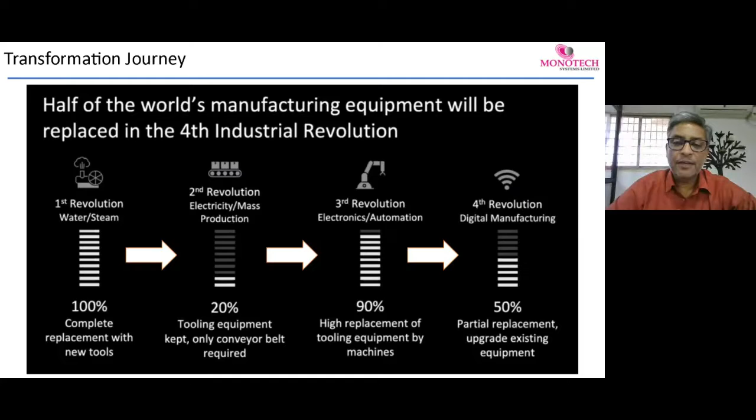As we know, half of the world's manufacturing equipment will be replaced in the fourth industrial revolution. I heard a few guests mentioning that we have not been through the three earlier revolutions with respect to shipbuilding, but it's like we are getting into the fourth revolution directly with these technologies. I guess shipbuilding and maritime will have a great opportunity getting into additive manufacturing and the fourth revolution with these applications. So we believe this is going to be the future and it's going to stay, but it also depends on which application, which technology has to be suited.

This is where we would like to provide a value proposition of AM in maritime shipbuilding. We'd like to break it down into a few things: what is the value proposition of AM in maritime and shipbuilding. We've been listening to metal technologies, metal printing, but there are other technologies as well which could provide value to maritime and shipbuilding. When we break it down to the basics, we talk about lower costs, which is a requirement of any industry today, probably not for aerospace, but for others, even maritime and shipbuilding. The requirement of lower cost is very important, which can be classified into products, the clarification of what is required, and supply chain.

And so the products, we will have to go for less material and no tooling or cheaper tooling. So this is what will give us lower costs, and in the supply chain it will result in less transportation and less warehousing, as we heard Dr. Ashok Verma saying that less warehousing and less transportation is going to be the result of additive manufacturing, which is going to have localized manufacturing.

We are talking about better designs. So complexity for free, different materials or multi-material options, optimized integrated functionality and part consolidation. So these are all things which are the basics for additive manufacturing in any industry. And this will be the beginning of additive manufacturing in any industry. And this will further go into manufacturing and rapid tooling, etc.

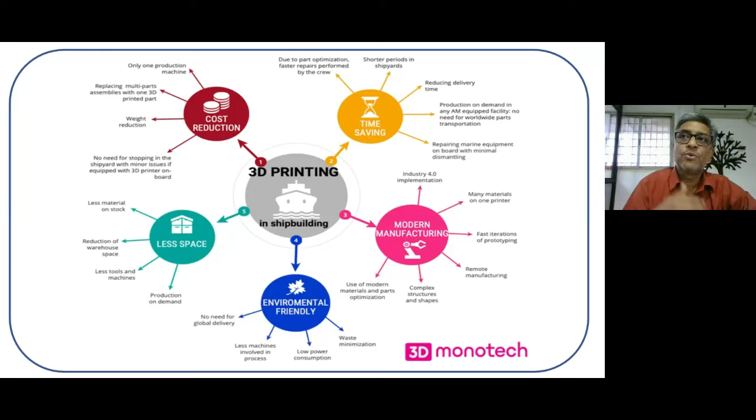What if you can have a robot with a DED technology into the submarine to do that sort of operations? These are the boons which this technology can really bring about. And then we go into the further of what these value propositions mean and the technologies which can be utilized for this, which is scanning and reverse engineering.

For example, we are talking about many components which are obsolete or produced by castings, and most of them it's very difficult to actually inspect them. So we could either inspect or reverse engineer, or we can do periodical quality checks using scanning and reverse engineering. And a small video on this. Sorry.

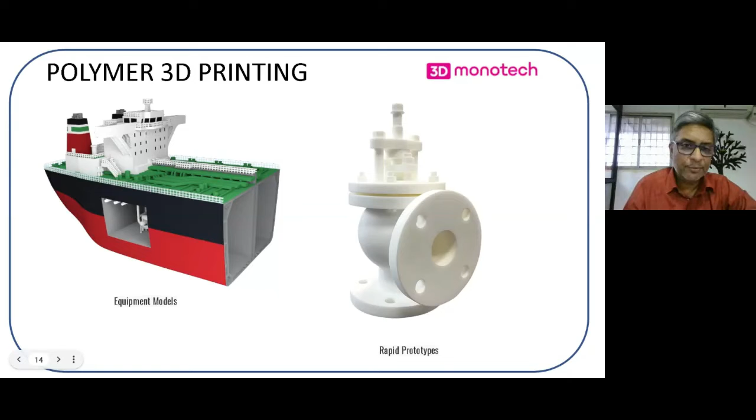But what we need also is planning. So for planning, we will need equipment models. We have to have accurate models which are as per the parts, and also rapid prototypes. So these are also important parts of this industry. And also, how polymer technology can be utilized for larger structures in sand casting patterns. This is a small video I would like to show.

At CJR, we manufacture stern gear for luxury yachts and workboats. We focus on the quality of our products, so every propeller has to be perfectly designed for the boat. So we tend to design every propeller bespoke to that vessel, so that it's perfectly matched. And in doing that, we need to produce new patterns for every propeller that we make. And the 3D printers have assisted us to make those patterns quickly and cost-effectively. Since we bought the BigRep printer, we're able to control the whole process of printing and manufacturing patterns, which means that we are far more competitive in the market.

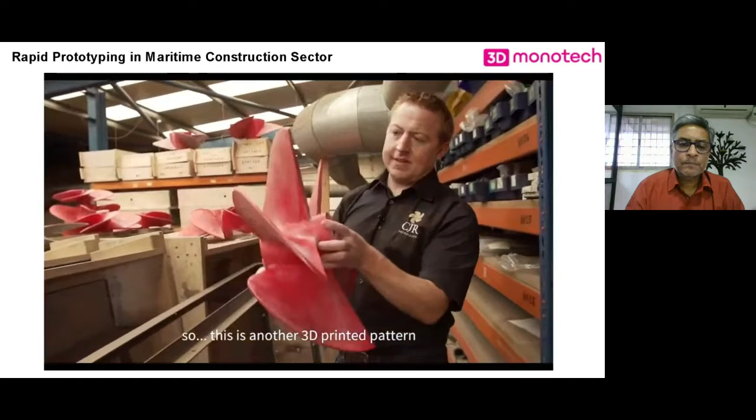This is another 3D print pattern. This is for a surface-piercing propeller, which is not fully submerged. It sits on the surface of the water, for very high-speed boats. And again, this is something new that we wouldn't have been doing without a 3D printer, because it's so cheap and easy to make the patterns that we can experiment with many different designs.

With previous deliveries, it all went well with our pattern makers. We were talking weeks, now we're talking hours. And the other great thing for us is we can start the printing on a Friday night. We can let it run over the weekend, and then Monday, Tuesday we come in and we've got a pattern which we then do minimal work, a bit of filling, sanding, painting, give it to the foundry, and they're ready to work with it. So it's really cut our delivery time down considerably.

So this shows us how polymer patterns can be used for sand casting, which is a big boon for the industry, where large patterns have to be made and multiple iterations have to be done in order to test and finalize the best pattern or the best part. So we're talking about hours instead of weeks and months, and this was prototyping and

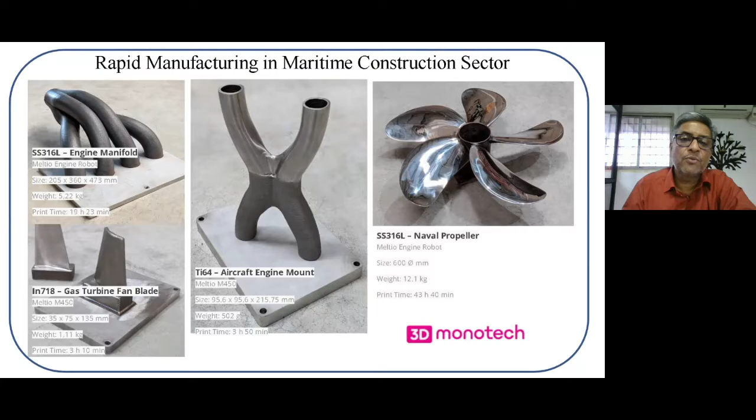where you could use wire or powder or both to produce parts which were really not possible in the earlier stages. And it is also low cost, because you are utilizing welding wires which are available in the market easily, and it is low cost to own and operate. So when we talk about maritime and shipbuilding, cost is an important factor. When we come to manufacturing, naturally the cost is compared to conventional manufacturing costs, and this technology really brings it to that level. But it is also able to produce complex parts, the way you can see it right now.

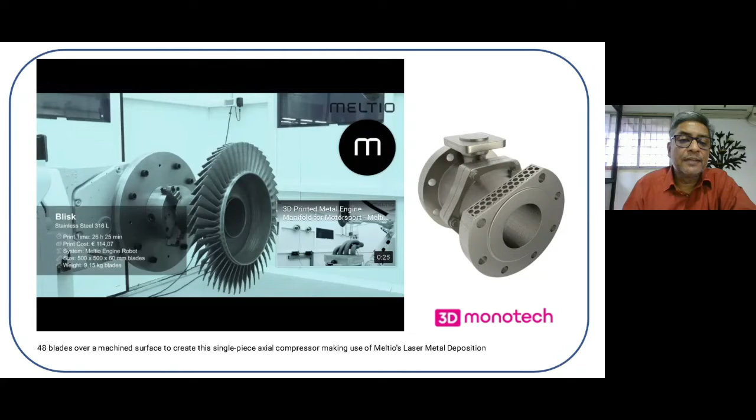And then, of course, this video was already shared earlier, but just to refresh memories, I'll show it. This is how you could do repair jobs, and 48 blades, made in a few hours' time, to create this single piece axial compressor. So this is where rapid manufacturing is, and repair jobs can be done very easily using the Meltio technology.

So I would just get into a brief overview of the metal AM technologies. We have been talking about various technologies, including DMLS, ADAM, which is close to metal injection molding. We have WAAM, EBM, SLM, LMD. Overall there are many variations, and the selection criteria depend on a lot of factors and on our priorities in terms of printing technology. But as of today, when we talk about conventional versus pure AM versus hybrid, we really think we are in the hybrid mode, where hybrid manufacturing is the right choice for this industry: while we use the conventional methods, additive manufacturing can be integrated into this system.

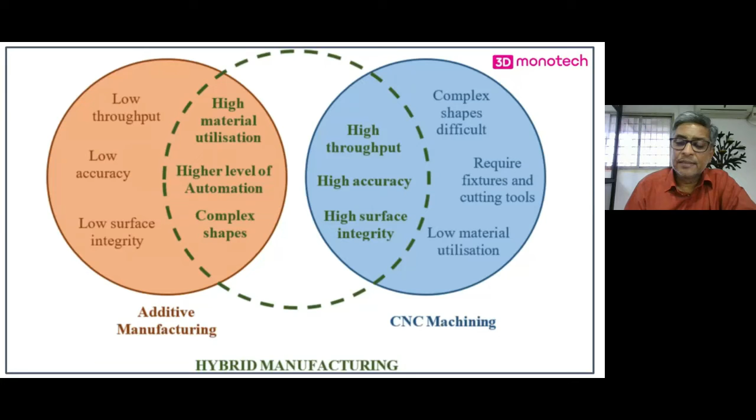So there are a lot of advantages. The combined advantages are more than the individual ones, as you can see, between additive and CNC machining. And we are right here, in the hybrid system. We know that pure AM could be tomorrow, and traditional manufacturing was the past. Today is hybrid, and we are here with the technology. We talk about the various types of energy deposition systems: laser-based, electron beam, plasma, or electric. They are further divided into powder-based and wire-based. So there are various models, manufacturers and technologies within DED available in the market.

The advantages of DED are far more than the other technologies put together for this industry, because there is basically no size limitation, the choice of materials is larger, and the manufacturing time is reduced. We can have faster printing, and since we are printing large parts, the accuracy needed is not as much as in the automotive industry. So you could use this technology for near net shape parts, which can be machined later on. You can go for a multi-material range and easy material change. That's important, because if you print one part for one component and go back to tooling, you need to use other materials. It is very easy to change over.

Disadvantages, of course, are high capital cost, low resolution, and no support structure. So if you have an XYZ system, it's very difficult to remove the structures, because they're going to be solid supports. Hence the hybrid technology, where you use CNC or robotic integration, which can reduce the overall support structures, and you will have more degrees of freedom.

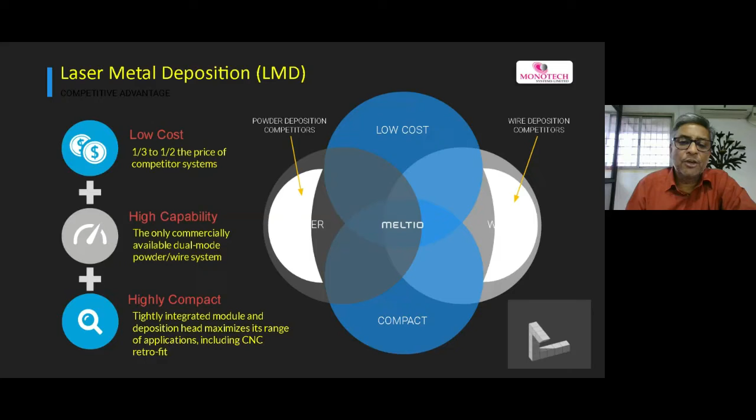For all these disadvantages, Meltio has a solution, which is basically a low cost, compact, high capability machine. It has got a standalone system, and it can use wire and powder together in the same system, in the same head. That is a very big advantage: powder for very thin structures or very fine details, and wire for fast printing.

And if you see, in every comparison in this segment, this actually stands out compared to the other technologies. The heat source also, when we talk about Meltio's lasers, they consume very less power, they're easy to use, and they create lesser stresses for larger components. So it's a very easy to use and very safe system.

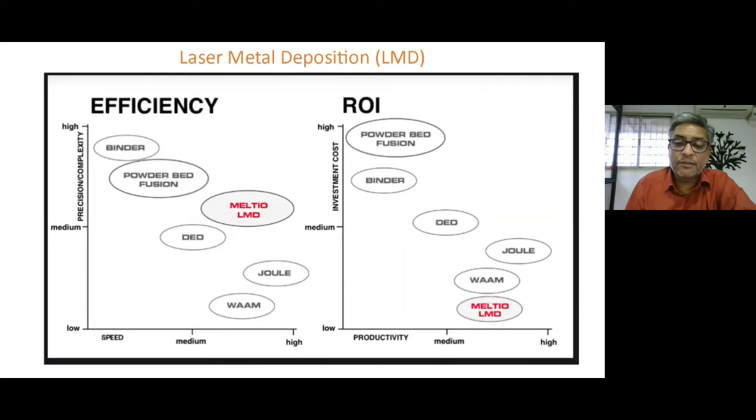And if you see LMD in terms of efficiency and ROI, for efficiency it is almost in between. In ROI, it is highly productive for the low investment you have to make. Integrations with CNCs and robots are possible, with existing CNCs or new CNCs and any existing robots as well. So these are the benefits of DED technology.

You can see all parts being printed very easily. The degree of freedom depends on the equipment you are integrating this with, and that's the technology benefit you have. You could actually replace these applications using this technology. We are also talking about multi-material capability with the same machine, or a dual wire system where you could use two different materials.

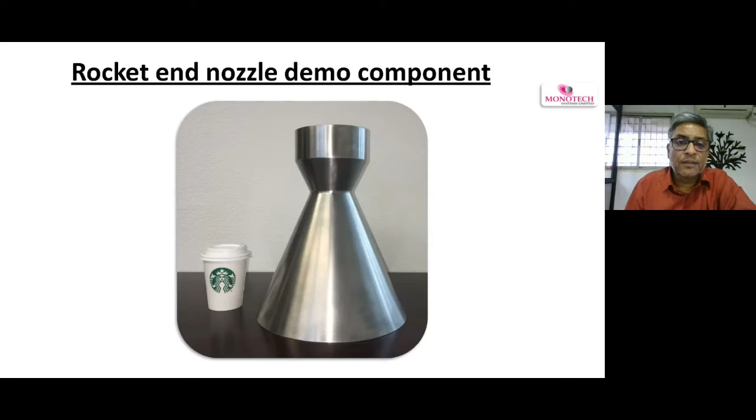And for those who think this is a rough structure, how does the output look after machining? You could get as good as the end nozzle you are looking at right now. These are the components which are printed, and the variety of materials is second to none among additive manufacturing technologies. So I conclude by saying that the way things are being made ranges from complex structures to the simplest way of creating a prototype, a product or a tool.

So for the Meltio machine, yes, it does take place in an inert gas atmosphere, but only around the wire. So we don't need an inert gas atmosphere around the whole setup. When we are integrating with a CNC or a robot, the gas is flowing just around the wire. There are small pores around the wire; the wire is in between, and the gas is on the side. So there is very low gas consumption in this case.

Okay, thank you so much, Rajesh.

So Rajesh and Monotech, they are also our 3D Graphy associate corporate members, and I'm sure as a community we will also be able to address each of these requirements as we progress working together. And respondents can also reach out to us, and also Rajesh, in terms of the requirement going forward. Thank you so much, Rajesh, for your presence, and please do be there as we progress through the day.

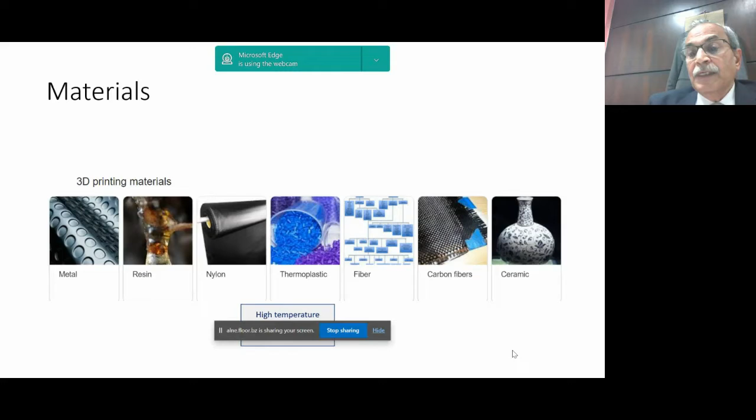Having said that, what are the materials? Because the biggest challenge, as Dr. Kakuri, I'm not able to spell it correctly, Khandupuri, specified, is the material, a critical part of AM apart from the technology. We as a company at Adroitech have been working in metal, resins, nylon, thermoplastics, which are high temperature thermoplastics, fiber, carbon fiber, as well as ceramic.

We have been working with composite materials like Onyx, which is a mix of carbon fiber with nylon, and Onyx FR, which is fire retardant material combined with carbon fiber. In some electronic applications, you need electrostatic discharge protection so charge doesn't build up.

We work with continuous fiber as reinforcement, and in many places you have impact factors which need to be taken into account. We work with Kevlar, and where wear and tear is very high, as well as where high temperature requirements come, we work with HSHT and fiberglass.

In the area of metal, we work with stainless steel, copper, Inconel, A2, D2, which are hard materials, and H13. Some of the parts were shared, so you could work directly with pure copper and build up parts which can be used for functional applications.

You could work with plastics and resins, which give you pliability, durability, and softness, and some integration can be achieved which is very good. So you could see some examples of how engineering resins can be very useful.

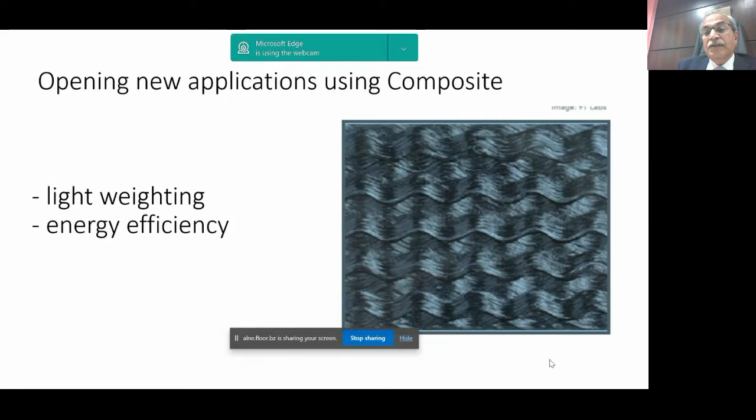Our specialization has also been in carbon composite, and we have been working on carbon composite for the last 4 years. Today we have generated parts for drones, for the Navy, and for different defense applications as well as industrial applications, because the fiber itself gives you strength far higher than aluminium strength. With continuous fiber being added, you are able to get flexural strength which is very high, and the strength in the direction in which the fiber is laid is measured in GPa, not MPa.

We also work in ceramic with materials which give us dielectric material properties, and also help in the telecom area to make parts, because they are not affected by EMI and cannot be traced very easily. Printing intricate structures in ceramic is something we have taken the lead on, and I think we are the only people manufacturing ceramic parts in India.

This gives us the capability for high temperature environments, as well as very low wear and tear. It could be in alumina, zirconia, or zirconia black, and very complex parts can be generated with this.

Now, I initially thought I would cover some Navy applications done globally, but my previous speaker, especially Daniel, had covered many of the applications, and there was a lot of discussion from Khandukuri in terms of how certification has been done and what parts are being used. And Mr. Paul also highlighted some applications.

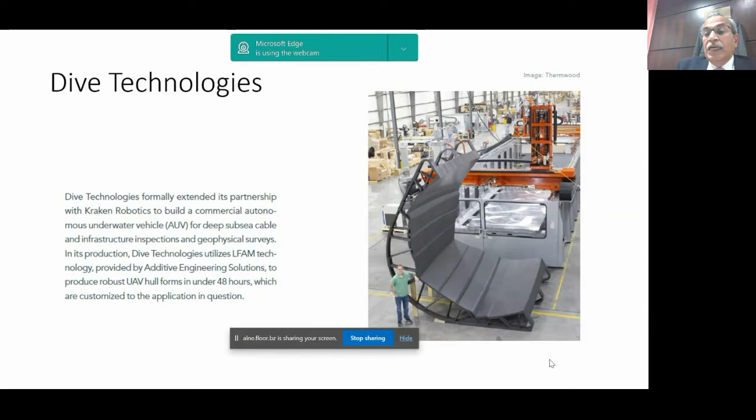This is work done by Dive Technologies in partnership with Kraken Robotics to build a commercial autonomous underwater vehicle for deep subsea cable and infrastructure inspection. It was not used as a direct ship, but when one needs to do inspection or underwater operations, one still needs the necessary equipment, and this could be one such example where large parts could be produced.

That is what we have been doing in terms of this. So when we started working with one of the projects of the Indian Navy, which is Shivaji, the critical requirement was rapid prototyping, obsolescence management, data digitization, reverse engineering, and replacement of casted parts. These were some of the key applications, and they wanted to take the 3D printer onto the ship itself.

We started working with them about 1.5 years back, and today I'm very happy to say that it succeeded. One of the companies has started working with Indian Navy by taking the 3D printer on the ship. We had done this successfully, and now we are starting that project. The critical requirement is to do reverse engineering, creating the digitization, and then building up the part for taking it forward.

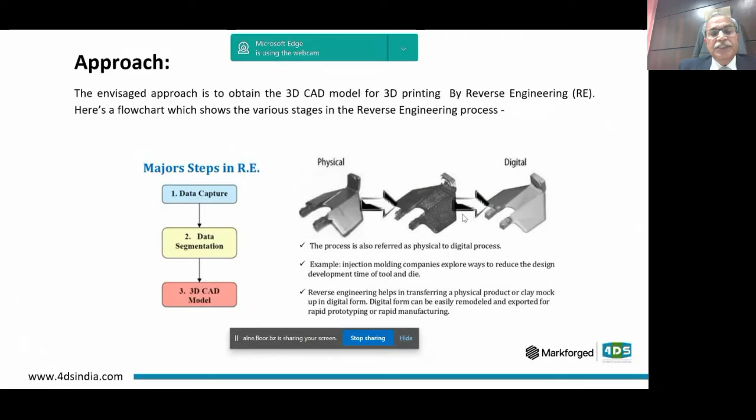This is what you do with a physical part: reverse engineer it, create a digital inventory, and with that 3D CAD model, you can do the printing. Some of the parts, if you can see the original part and the 3D printed part, they function the way the original part was working, whether it was a gear or different types of shafts. They got assembled, and they also had the accuracy within the tolerance limits that was worked upon. This is some of the parts and complexity which can be addressed with the help of 3D printing.

But another very interesting example are the small parts, not just the big part like a boat hull using composite, which we can do very easily today, whether it's carbon composite or fiberglass composite. Equally important are the small parts which need to be made in elastic material, rubber-like material, which need to be put as a holding mechanism required for creating brackets of different types. Another example is the pipe braces for the brackets and the pipes which need to be created.

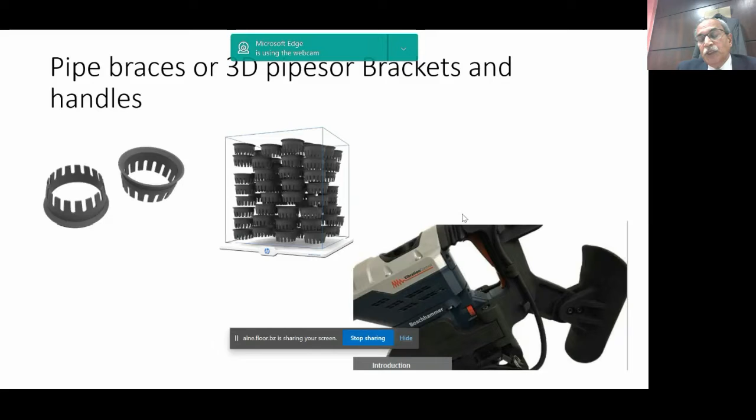I'm just sharing with you how quickly these braces could be made, which would hold. Typically in pipe leakage, the braces play a critical role, and they can be 3D printed and then used for maintenance of the leak pipes.

Another example, used in Australia by one of the customers, was in sensing payloads and the equipment necessary for putting these sensors in the system. Now this is not a part which functions by itself, but it is a part required for creating the whole of the different types of sensors which may be fitted and utilized. This was an example which we had done ourselves.

We developed the flexible coupling with different designs and different materials, including carbon fiber, for high torque applications. Here we use the carbon fiber, and you can see it could withstand a torque value of 750 newton meters. We did try different designs, and finally we were able to succeed, because originally even with carbon fiber it was cracking, but then we reoriented the carbon fiber to give this type of design.

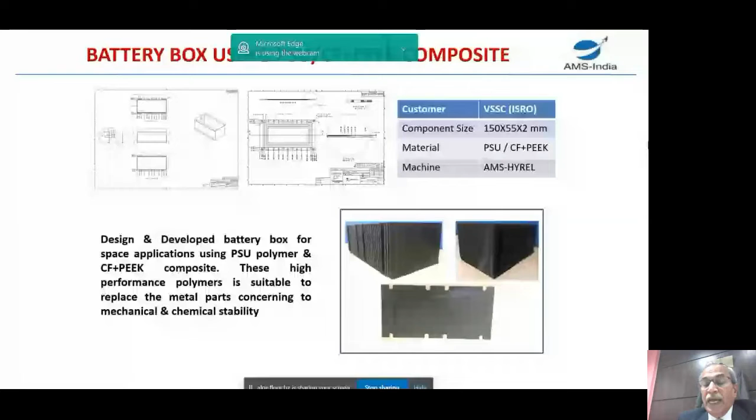So I'm just, as a company, sharing examples like graphene powder for making panels, making the filament guide roller for extruders, and applications like this.

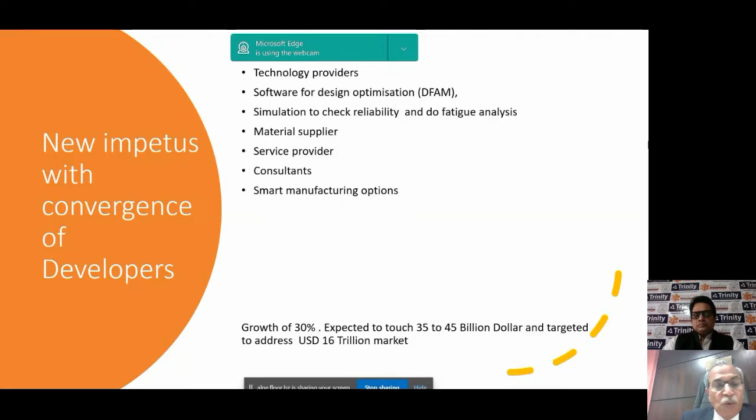In brief, I would only say 3D printing is not just getting developed by the technology providers, but by the software developers, simulation people, material suppliers, service providers, and various consultants. It is growing rapidly, and some of the companies which have been working are people like GE, DMG Mori, BASF, Henkel, Arkema, DuPont, companies in software development like PTC, ANSYS, or service providers across the globe, and that is what is leading to the growth. So I'm just sharing a quick example of how we started doing the work.

So we first put the 3D printer in the middle, where the vibrations are minimal, and then we put it on the corner, and then we tested it.

These are some of the parts, from scanning to 3D printing, we were able to produce for another naval organization. The other thing done by Markforged, which is very great, is that they made an industrial field edition, so you can actually carry it and work even on a truck with no problem.

It has a large build volume and is fully on the mil specifications. You can support the 3D printer and work in the field with no major problem. It has different types of foaming structure, aluminum honeycomb, lightweight support layer, and things like that, giving it the capability of being carried around on a truck and then worked with.

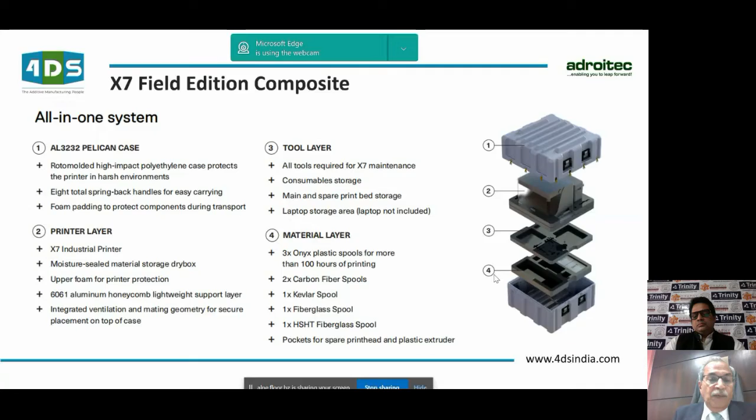So, in brief, this is what I had to share in terms of material and technology. All of you know about these technologies, so I don't want to touch upon them. There are SLA printers, FDM printers, which are very accurate, giving us the capability of printing in any of the resins, which gives high temp flame resistant material, pliable elastic material. And of course you have heard about the metal technology at length.

Instead of me highlighting about them, I think the other technology we are using is MJF technology, multi-jet fusion technology, which enables us to produce plastic parts in nylon in very large volume every day. We created in the last year more than 2 million parts for the drone industry, the aerospace industry, the automotive industry, and medical health industry.

During the pandemic alone, for the various equipment which had to be made, we printed using this type of printing technology over a lakh parts in about 20 days time.

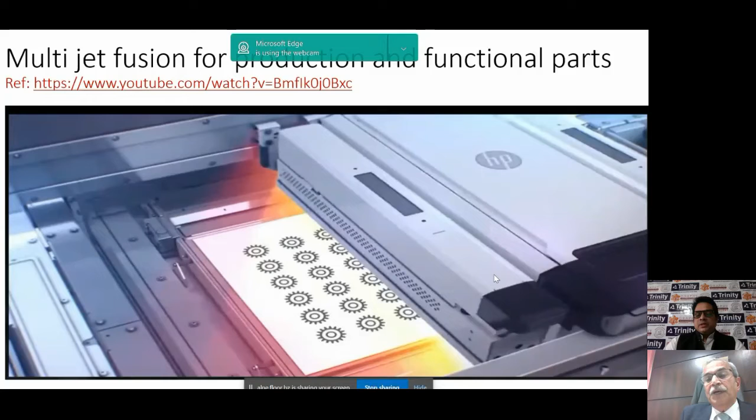The next technology not touched upon is composite technology. Within composite, not only can you produce the part in composite, but you can further reinforce it with continuous fiber. Markforged and some other technologies provide that continuous reinforcement in the direction, and instead of going through the layer process, one can actually, within the 3D printing process itself, realign the fiber in different directions and get the strength in the XY direction, which is isotropic.

The Z direction would be slightly less, but there are different techniques of creating inserts by which you could produce it for different applications. So using Markforged, you can produce metal parts, you can print SLA parts. This I have already touched upon.

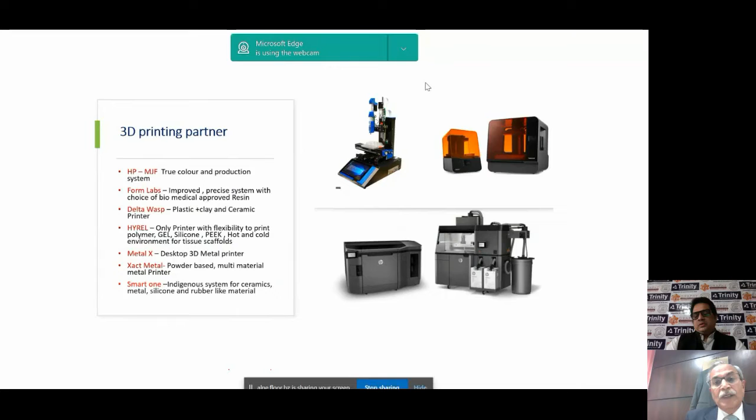So we today as a company have HP MJF, we have Formlabs, we have a Delta WASP which prints in plastic and clay. We print in metal. We also print in ceramic and silicone and rubber. That's an experience which we have gained over a period of time.

We also have a team which does design for optimization, design for additive manufacturing in terms of reducing weight and improving the capability of integrating the parts so that the reliability of the parts can be ensured.

Now, you have heard of applications in maritime which are on the ship. We also work in terms of 3D printing of a terrain model, which in the sea is a reverse model. So you could also create a shoreline as well as the sonar wave reverse engineered into the terrain model of the sea.

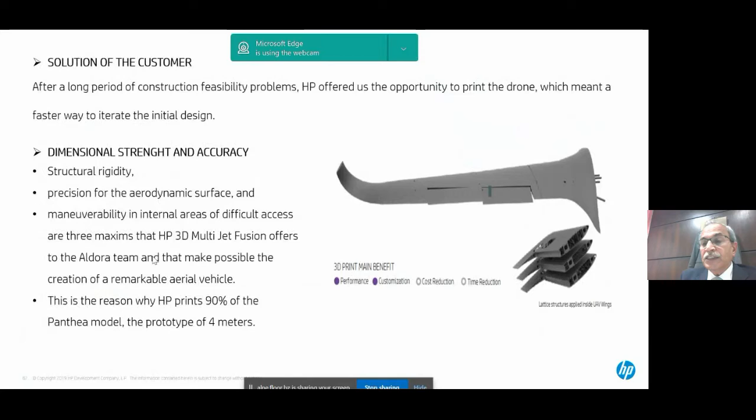We have used it for drones, some of the parts which have been done, including the camera fitting, which may also be very critical in your day-to-day applications. It could be for creating structures, could be creating hollow blades which can be used, and different types of components which can be a replacement of metal parts, or maybe used as a replacement of injection molded parts. Having shared with you, these are some of the examples.

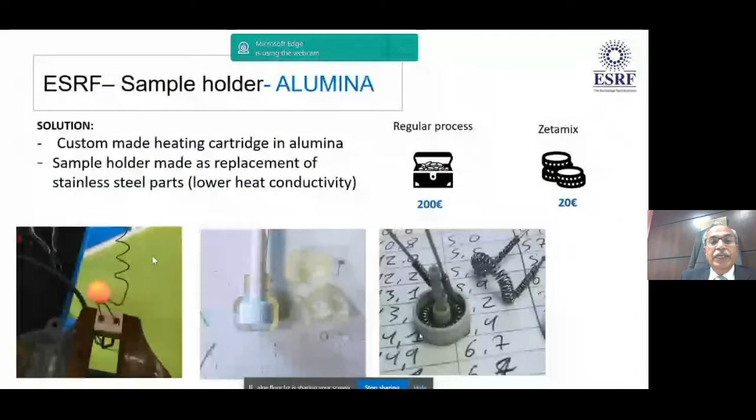Thank you very much. I shared with you a couple of applications, a couple of technologies, and as a company, we are a solution provider, which means we provide you the full equipment and enable you to do the production yourself. And we are also a service provider. So even if you're not buying the equipment, we can provide you the services of developing the part. And once your needs get identified and matured enough and you have proven yourself, you could acquire the solution from us. Thank you very much.

Thank you, Dr. Saurabh. A small, quick comment and a question. You were mentioning graphene technology. Could you elaborate what has been done till now in that? Sorry? You mentioned graphene technology. Yes, sir. So, what are the items you have created from graphene? Sir, it is at an experimental and project level. Some of the professors wanted to work on graphene. So we actually created the graphene powder, and with that graphene we were able to give them some parts which they are now testing and doing the characterization.

I would like to have a one-on-one discussion with you on some specific requirements for military use. So, I'll take your contacts from Dr. Shibu John and get back to you. Yes, sir. Thank you, sir. Sure. Yeah, thank you so much, Saurabhji.

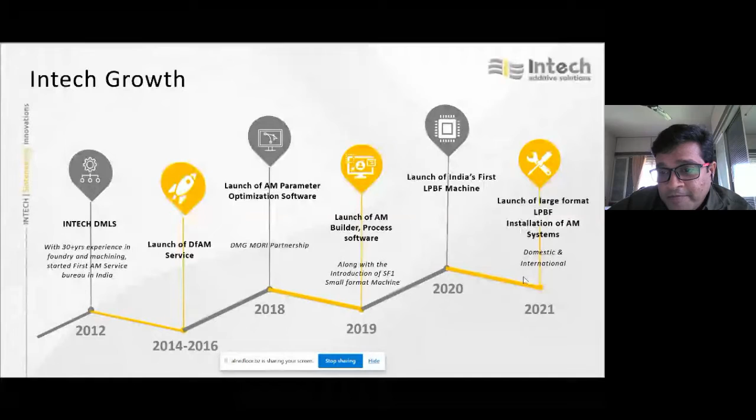And then in 2021, we also launched our large format machine, and we have several installations done today in the domestic market, and one international customer. Very proud about this growth that we have had in this past calendar year. 2020 unfortunately was all pandemic, and we used that time to do more R&D on our machines, do more testing, and the result is we have over 9 customers today, 8 of them in India and one in Europe.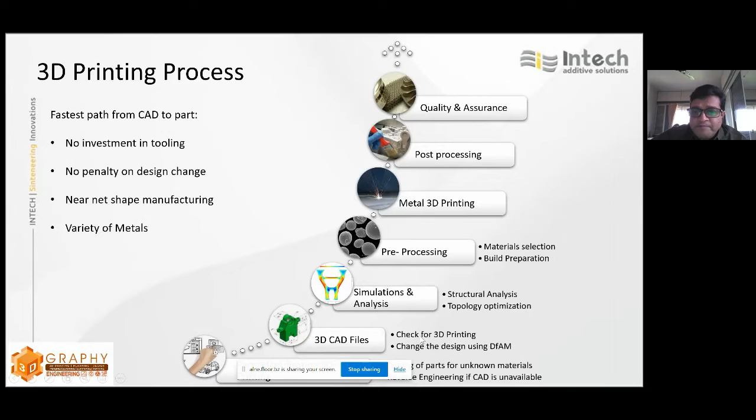Yeah, so this is typically how the process would start. You have to look at the parts, if materials are known or unknown, do reverse engineering, check their viability or feasibility, economic as well as technical, for 3D printing. Maybe use design for additive manufacturing principles to modify those designs to make them best suitable for 3D printing. Once that is done, some simulation analysis, whether CAD or structural, can be done.

Important that, while we say a variety of materials are available, there's still a certain library of materials available, though it is getting enhanced almost every month, I would say. Then the build preparation, then you print the part, finish and post process it depending on the requirement, any heat treatment if required, and then do your quality assurance. So typically this will be the workflow.

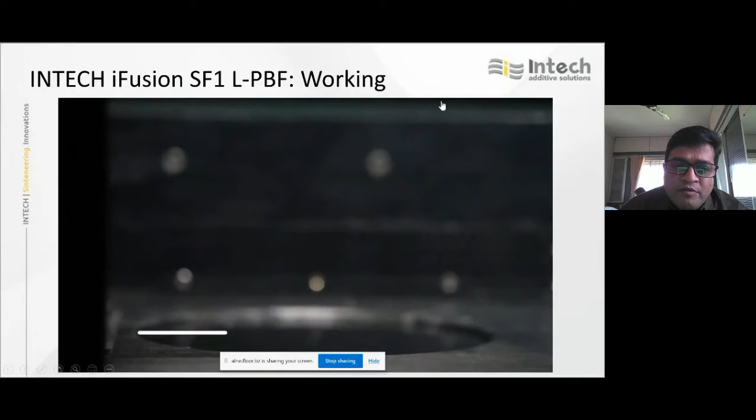This video, I hope you can see this, is about our small format machine, more about the process. So iFusion is the name of our brand. This particular small format machine has a cylindrical build envelope with a height of 180 mm and a diameter of 150 mm. We chose this configuration from the experience we had delivering metal printing services for several years. This is a sweet spot, best in its class in terms of the size and the value at which customers can acquire this technology.

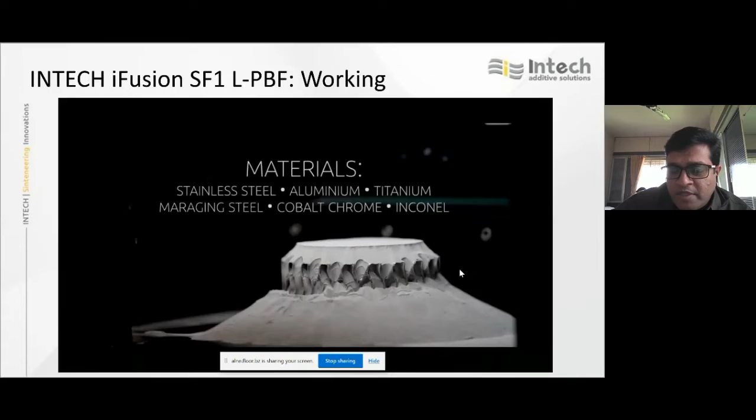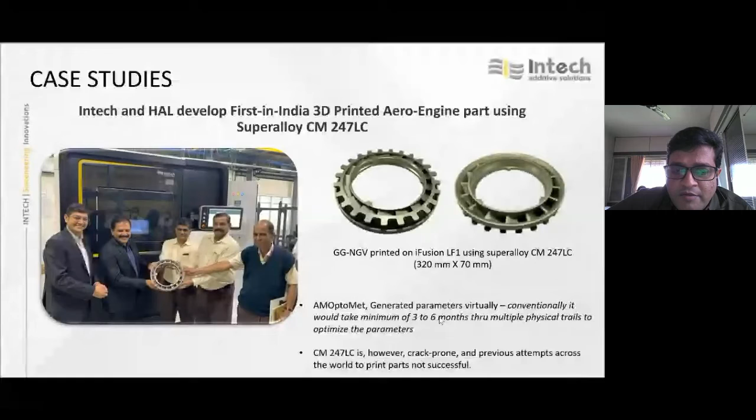Typically, any new alloy development is a matter of huge investment in time and cost. But AMOptoMet, with all the algorithms that we have developed, all the data analytics that has been put into it, again backed by our experience, we got this part done in a couple of weeks. And the uniqueness of this material is it is crack prone, and previous attempts by the LPBF technology company have not been successful in actually producing a functional part with this material.

So for the maritime industry, I'm sure there are materials which are standard, and there will be non-standard exotic materials, and we as a company, Intech, can bring a solution to the maritime industry in India and of course across the world to develop new materials, specific materials for marine applications, whether they are corrosion resistant or fire retardant, and I'm talking about metal. And so we have the technology, we have the solutions to deliver it faster.

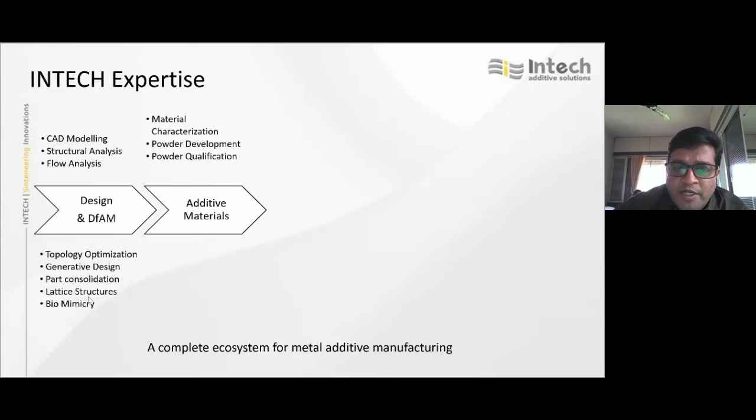So just to summarize some of our expertise again, we have structural analysis, CAD modeling, reverse engineering, flow analysis, use of topology optimization or generative design, lattice structures, with all the tools and the team in place. Material characterization, powder development. So we have a technology development department which gets into new material development and powder qualification. Our softwares, our hardwares, we have in-house.

Post-processing capabilities from surface treatment to machining, quality certification, and then we also get into low volume production, and on a very special note, we don't take any inquiry which is just about 3D printing a component. So if the customer is facing a design challenge or a material challenge, ideally we would like to get into that, to offer higher end services.

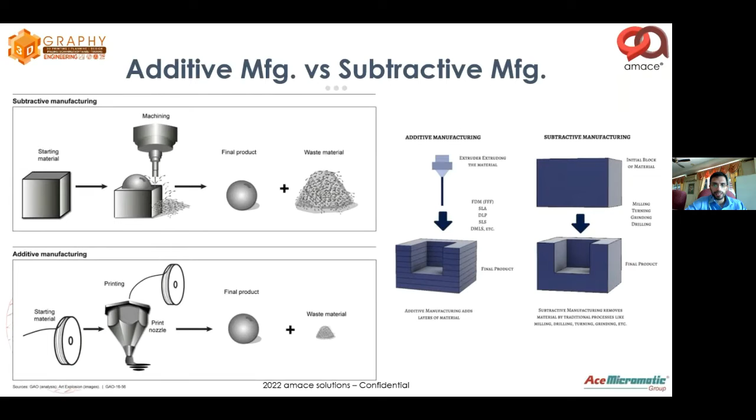So there are newer materials, the ceramics. We've had different types of complex materials being researched on. Combinations of materials are being researched on, and newer techniques which could combine them together and print them together are being explored and offered by manufacturers today. But as explained earlier, polymers and metals are the most sought after, especially for industrial applications and applications like maritime.

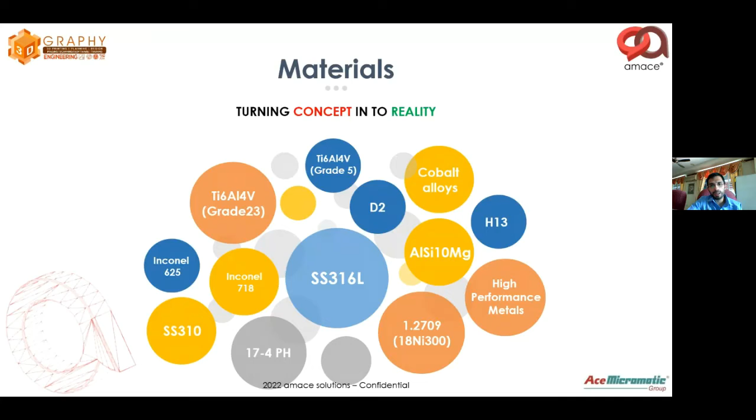We've had other exotic materials like titanium, aluminum, and different grades of other steels or cobalt chrome alloys, also gaining popularity today. So that's just a summary of the kind of materials being printed today from a metal perspective.

Now, coming to the main topic of today, from a maritime perspective, we've had interactions with multiple agencies and departments, both in India and outside, who have shown a lot of interest and who've done some work in maritime and shipbuilding.

But from a significance perspective, what we believe is there's a huge impact on economy. About 90% of the goods transported today are done by sea. From a number perspective, there are more than 24,000 containers shipping at any point in time, which is the largest size done. And from a value perspective, today we're looking at about $14 billion worth of goods at any point in time sailing, which is a huge value today.

So it is of immense importance to us as an industry for material movement. The small issue that happened at the Suez Canal caused huge disruption. In terms of damage, $9.6 billion a day was seen, and over close to 370 ships were waiting to pass during that 6-7 days of halt. So this could have a huge impact on the whole economies of countries.

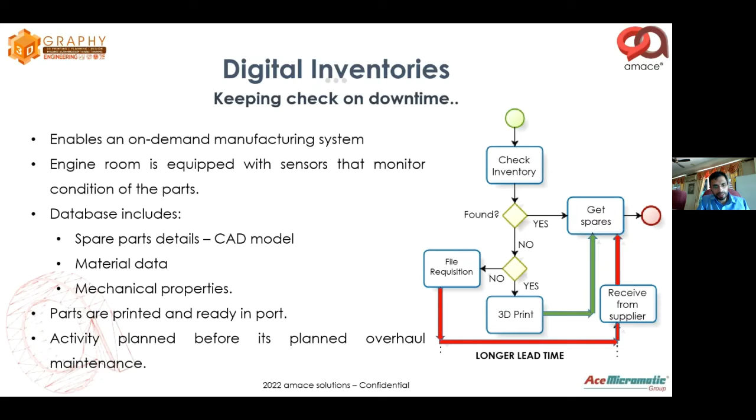Now, basically, a lot of manufacturers today are considering printing these at the port itself. So a lot of activities planned from an overhaul and maintenance, MRO perspective, and parts are being produced right at the port where there's a requirement, instead of being done at some remote location.

So a similar concept is being done where the entire manufacturing value chain is being disrupted. The entire idea is kept in cloud space, then it's 3D printed, and the local manufacturer provides it to the end user. So what otherwise would follow a very long route of value chain or supply chain is completely converted by this new method of manufacturing. This is what is drawing attention, shortening the entire production process, especially from a time perspective.

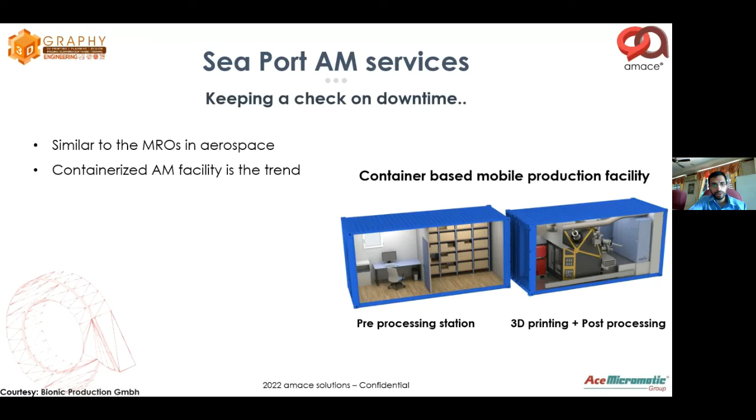So this is the interesting concept that I explained. A lot of manufacturers, especially in the West, have started creating the entire manufacturing setup at the port, where inside containers there are machines, post-processing, all of it fitted in. So it can be moved from one location to another, or they can be more agile and flexible based on the availability or requirement of the work. So containerization of the whole facility is what is gaining momentum in the West.

And so, especially at the naval bases, from a maintenance perspective, from what we know, the inventory of some of the spare parts required to be produced has grown into a very large list.

So a very long list which needs to be converted, and in some cases it can run into a few months to be replaced, whereas with 3D printing all that can be reduced substantially. One of the countries leading this activity is Singapore, which is a leading hub for maritime, and this has gained immense potential and momentum there.

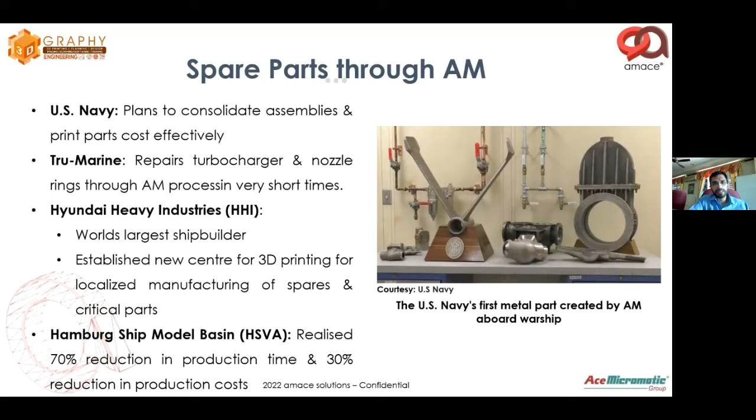Another popular name is Hamburg Ship Model, where a 70% reduction in production time and 30% reduction in production cost was achieved with 3D printing, where they've taken up additive as a key manufacturing process for a lot of their production parts. So these are some of the typical examples from a maritime perspective that we wanted to bring up.

From an advantages perspective, specifically here, we have shorter supply chain, material cost reduction, delivery time reduction. A lot of complex parts can be done with much more ease. We saw the on-demand manufacturing part of it.

From a preference perspective, specifically for industry-accepted parts, we have powder bed fusion, laser-based, and WAM for larger parts—these are the most preferred technologies from a metal printing perspective that are being seen today. From an end user perspective, we have ship manufacturers, shipbuilders, logistics companies, part manufacturers from a spare parts perspective, and naval vessel operators. They are the ones more popular from an end user perspective for this technology.

So just a few case studies of what we have worked on—parts like turbochargers, which have been done in stainless steel, reducing the entire machining time required to give you the end use part, or requiring very minimum finished machining.

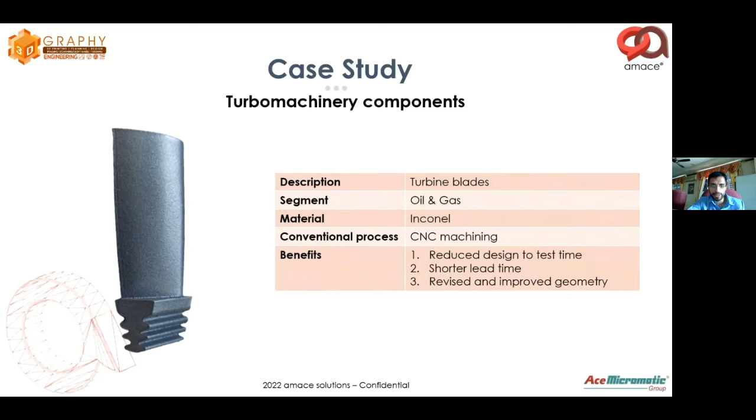Your turbocharger blades, either in Inconel or other exotic materials, are printed much faster and made available, reducing the machining time. Here again the advantage is much faster availability, reduction in machining time, and in many cases wastage reduction is a key aspect, because you have expensive materials that have to be scooped out, generating a lot of scrap, whereas with 3D printing all that can be reduced.

So from a need perspective, what we believe is there's a very strong need to bring down the overall cost of manufacturing, to indigenize this technology and make it available. Like Dr. Shibu mentioned, our initiative and intention is to do exactly that—enable this technology and make it available for the common manufacturer. It's generally considered a technology for corporates or large players, but our intention is just like how we were able to do for CNC machines.

Over a period of time, we would like to bring down the overall manufacturing cost and make it available for the medium scale industry, so that they can also have access to this beautiful technology, and they can make parts when the technology evolves and when it matures. So our intention has been to focus on productivity.

We've developed machines with high-powered multiple lasers to enhance the productivity of the machine. And what you see on the right is our product called the STLR 400, made in India, made by us, designed and developed completely by us. The reason why we bring it up is it's a large volume product, which means it can accommodate much larger components compared to what is otherwise available as a product.

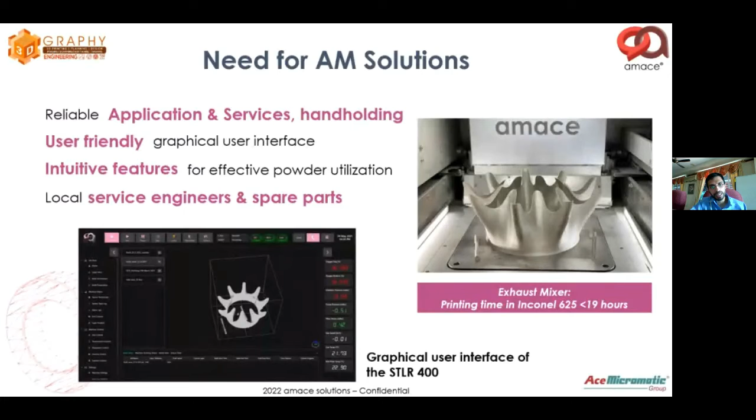we have trained manpower who are right now being groomed and trained for additive machines also. They will be available at very short notice to make sure complete handholding is offered to customers who decide to partner with us and go ahead in their metal manufacturing, metal printing perspective. So this is what we had to share in the limited time.

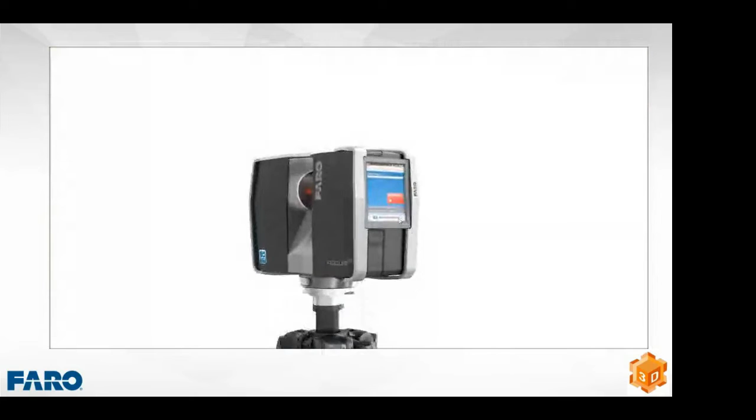Concept with a touchscreen display. It's as easy to operate as a digital camera. The rotating laser of the scanner touches, in the truest sense of the word, its surroundings. The laser beam is used to measure the distance to the object, and together with the device's 2 rotation angle data, determines the coordinates in space. Several million of these 3D coordinates result in a complete 3-dimensional impression of its surroundings.

So, if you see, this laser is emitted right from the center of the lens, and that is how it is reflecting back from the object, and the XYZ is captured with this laser. So that is how things are getting documented, and everything is documented in 3D format.

And then from this third picture, the collection of points can be transferred to different software like Aveva, Bentley, or ShipConstructor. And then further, the 3D model can be generated out of it. And finally, after creating a 3D model, there are a lot of things to be done. And for that, even the data our scanner captures is very useful. With that, you can do different kinds of analysis. I'm going to show you some of the things that are possible after capturing point cloud data.

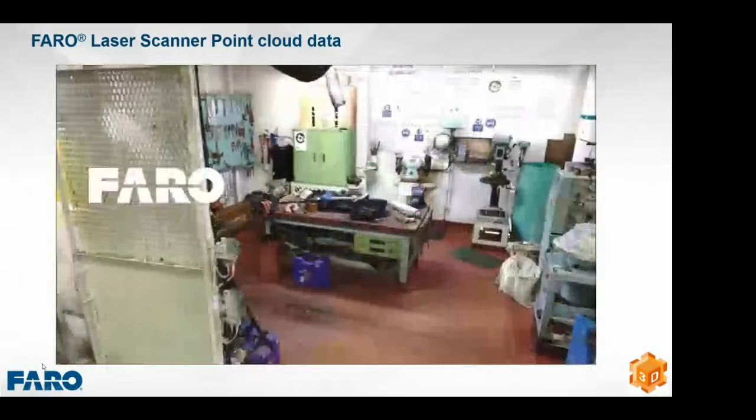So now you have seen how much detail I'm getting in this video. If you send any of your engineers to document this kind of place, he will take ages to complete all the dimensions for you. And even if he captures everything, he is going to miss some information for sure, because there are so many objects to capture. So considering that, if you send an engineer with a laser scanner, everything is going to come onto the desktop, and the choice is yours from what point to what point you want to measure, or which section you want to capture as a 3D model.

If a vessel is not sailing, it is actually losing money. So all the ship owners want to make sure that the vessel is on dock for a very short period of time, so that the operation time does not decrease. So for this reason, people are using laser scanning technology to capture the inside information of the ship, and this can be done with a laser scanner in a much faster way than the traditional one. Okay.

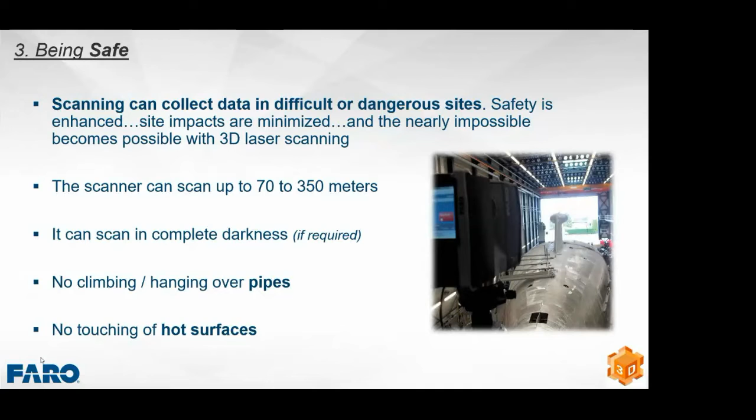And then being competitive: if you compare with your competitors, you will be more accurate, because you are using technology to do it. There are no human errors. Whatever comes from this machine is 100% right. Of course you are spending less time on the boat or vessel, and since you're using point cloud data, you'll be faster in delivering the output. You'll be safer and you'll use fewer resources, since you'll need fewer engineers to document the site. So with all these factors, you will be ahead of the competition.

After this, I'll speak about what more you can offer to your client, showing some factors which can give more to your client so you can win more projects. The very first one is the kind of output you're going to get. Let's say you want to scan a ship surface and create a 3D model out of it. I will show you one example from a customer, how they captured the whole front of a ship, and the output coming from the machine. Just a small video for that also. Just give me a second.

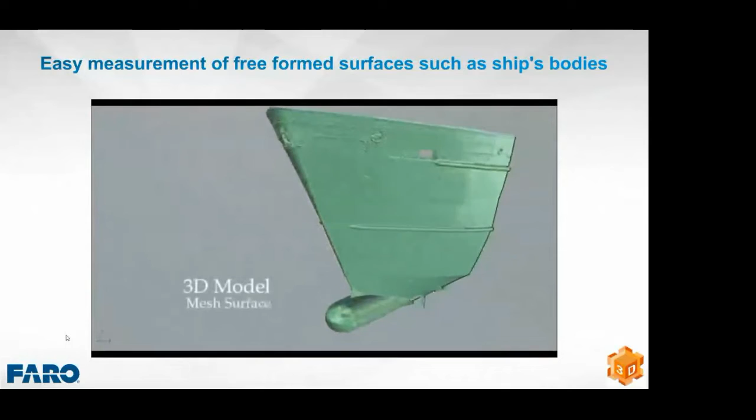So in this video, I've shown you the initial part was the point cloud data, and then with the help of software, the point cloud data was further converted to a 3D model of the ship. Okay. The next thing is, let's say you want to compare from the CAD model, you can use point cloud data and superimpose it on the 3D model and see how accurate your design is at the moment.

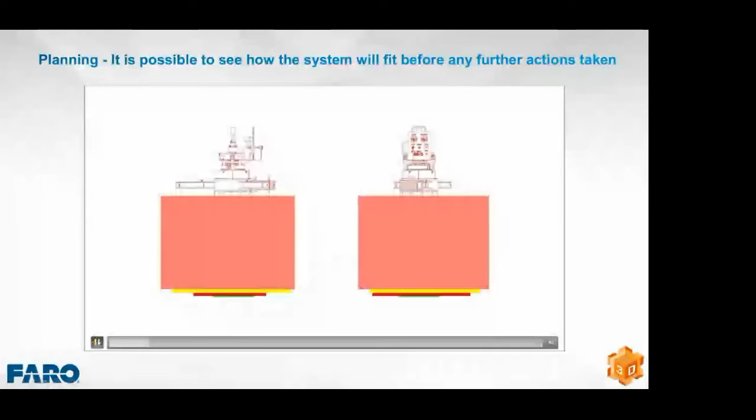Okay, now in this, what we are trying to show you is that we have scanned the existing facility, and now this 3D model is going to move around, and they are checking whether there is any clash on site when we move this part or not. So I will now play more and you will understand exactly what is happening.

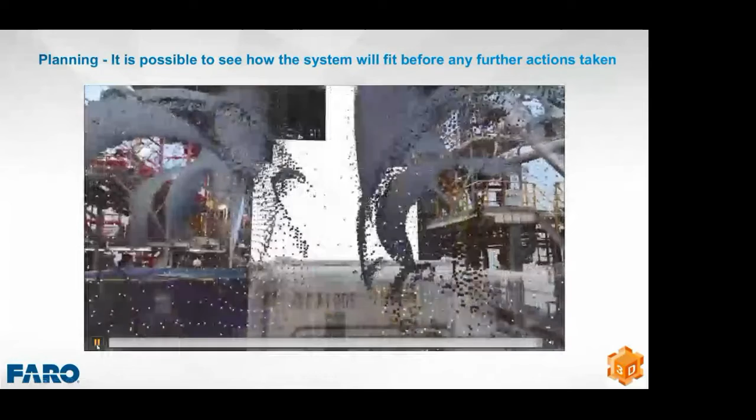So this is called virtual assembly, I will say, because they've scanned surroundings and then they have installed a 3D model on top of it. So that is how you can plan the new model, how that's gonna fit in the existing environment.

Okay. And of course, the data has a long-term value. Today, you are scanning something; it can be used for a different kind of work. You don't need to revisit the site because whatever you have scanned, that is scanned up till date, and whatever is there in the surroundings, everything is captured as a project, which can be used again and again. Okay.

Then ship owners and maintenance crew can collaborate online. We have a tool called WebShare. With this tool, a person on the site can upload scans, and the ship owners sitting in a different country, or the project owner sitting in a different country, can collaborate online and mention what changes are required on the site. Okay, so this kind of platform will definitely help these guys to take a decision faster and do their work on time.

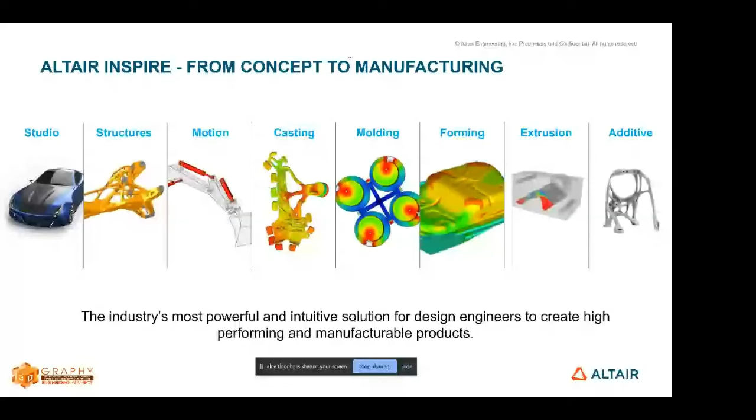Once the design has been developed, you can go forward to do manufacturing feasibility assessment, either using casting, injection molding, sheet metal forming, extrusion, or additive manufacturing. It's a very powerful, intuitive solution for design engineers to create high performing and manufacturable products.

In this slide, I'm showing you the animations of all these different manufacturing solutions, be it casting, sheet metal forming, extrusion, injection molding, or additive manufacturing.

So with that, let's look at additive manufacturing solutions alone. As far as 3D printing is concerned, we all know it has moved from being just an advanced capability for prototyping to a final production capacity. It is now finally being used to design, develop, and manufacture production ready parts. The different processes involved start right from extracting loads and the requirements on a particular system.

So here is a simple system that is being demonstrated. You can then use those loads to design and develop the early concepts.

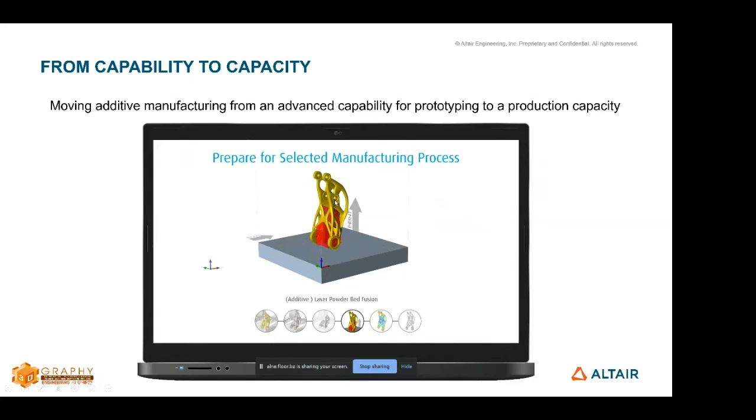Once that is done, there is a phase where you have to interpret the design and then do the sizing and orientation of the design. Then we need to use that concept to further go for manufacturing. You'll have to go in for a selected manufacturing process, then analyze the optimized design for manufacturability, and then export that final design to any 3D printing machines that you can connect.

As far as support for 3D printing machines are concerned, we currently support EOS, Renishaw, as well as SLM. So to begin with, I thought it would be good to really understand the early design concept.

Here I have a video to showcase how, for a certain robotic arm, you can design a new concept, a lightweight concept, which is a high performing design.

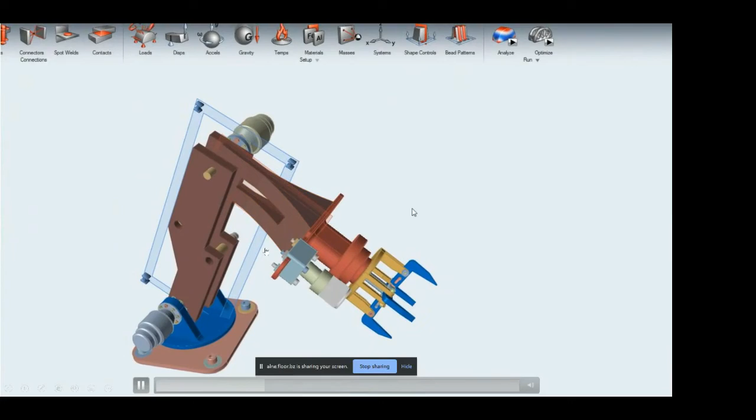You basically have an initial package space of the robotic arm, and then you define all the different manufacturing constraints on the design space that you want to regenerate the design for. Define all the loads and boundary conditions which are basically coming from this multi-body system.

Define the problem statement for the optimization, and then run it for optimization. Eventually, as you see here, it has removed material from all those locations which is not needed, and only retained the ideal material layout for the given loading and constraints.

Once that is done, the next phase is to basically generate that design. So here we have a feature called fit PolyNURBS, which will fit a PolyNURBS design on that concept generated in Inspire. As you see here, this is a very smooth geometry generated using PolyNURBS, which will then be assessed for manufacturability later. So this is the first phase of creating that design.

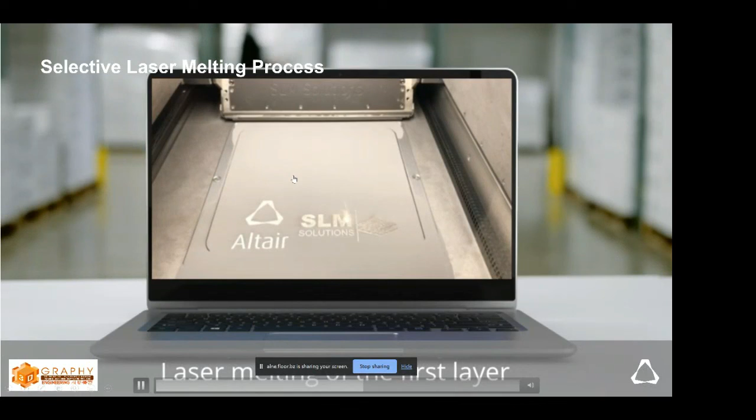Now, once that is done, we will move into additive manufacturing. Here I've taken the selective laser melting process. Everyone knows what is the process involved as far as SLM is concerned.

So with 3D printing, what are the key things which are important? One thing is part positioning. Depending on how the part is positioned, the printing time could be either high or quite less. So as you see here, for this particular product, if it is positioned in this particular fashion, we could identify that it would take around 6 hours to print it. But if it is aligned in a different direction, the printing time is around 11 hours.

So there is so much difference as far as the part positioning of the component is concerned. To really understand how much time it is going to actually take to print at a very early stage in the design process is very important. As we are generating the design, it is very important to understand what is the printing time, and that is what this technology is really helping engineers to do.

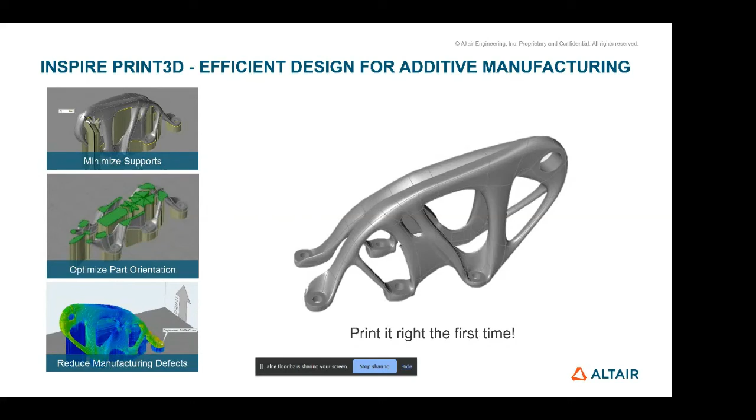So there are many issues that you'll need to account for. So while you're actually designing this part, how you can introduce all these variabilities and see how you can come up with the right design for the 3D printed part. So here is a process, meaning we have a video which is running on the right side, and these key 6 or 7 steps which are basically involved in the complete process-driven workflow as we see here.

So the first thing that a designer would do is select and prepare the part, right? So we start with importing the geometry, and once the part is imported, we will assign a certain material to it, the type of material that we would like to use. And once that is done, the next step is to configure the printer. So there are different printers that the software supports. The first one is EOS, there is Renishaw, and then SLM as well. So the engineers can choose between all these different printers that he would like to use for printing.

And finally, he will go to the next step of orienting the part. Orientation of the part has a huge effect on the final quality of the product. And it is very imperative for the designer to look at all the different possible scenarios of the orientation and see the effect of that on the final printed part. So here in this process, the engineer can start looking at various orientations. He can actually change various orientations in this particular process. And of course, there are lots of options here to vary those orientations, either in the X, Y, Z, and even the distance from the 000 location.

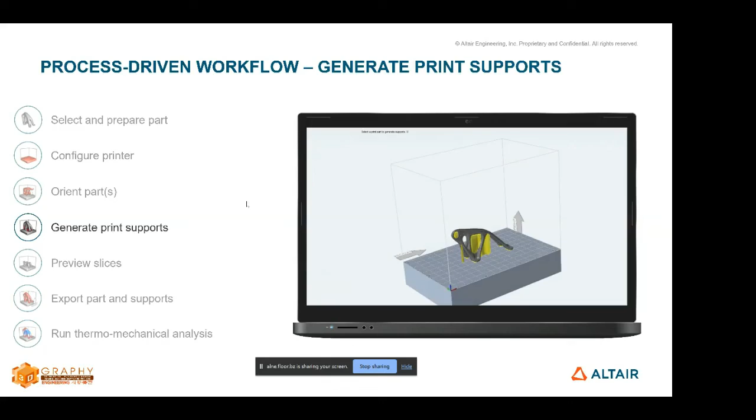Once that is done, then he can preview the slices. So he can go through the entire geometry and then look at the cross section of the geometry and preview the slices of the oriented part. Once that is done, he can then export the part and the supports. And then finally, he can run a thermomechanical analysis. And this is basically to look at whether there's going to be large deformation, what are the stresses, what are the displacements of the final geometry, what is the temperature of the final part, and so on, right?

So this whole workflow of 6 to 7 steps allows engineers to look at all the various process parameters and change those parameters to finally see the effect of that on the final manufactured part. And once he does all that, once he optimizes all these processes and gets an ideal high quality printable part, he can then export it to the machine that he's going to use.

So the key features that the software provides: it basically helps us to generate the support structures as part of the design process where you design the part. It is a very easy to learn environment. It is very intuitive in the sense that it is very icon based. A set of 6 to 7 steps involved in going through all the various processes to not only design the part but check for manufacturing feasibility.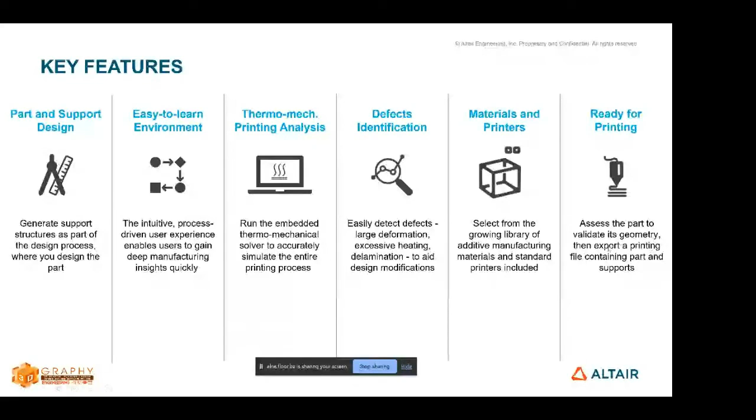There are various materials that are supported. We have a library of various materials that the engineers can choose from. And then, of course, the three different printing options that we support. And then finally, the export to the final printer, which is ready to print. Okay. So these are the key features.

Of course, we have been working with a lot of organizations, mainly in aerospace, which is one of the key market verticals which has adopted 3D printing widely. But of course, even automotive and many other market verticals are also looking at this technology in a wide scope. So we've got a lot of testimonials from different customers, and here is one of those testimonials showcasing that the software technology is really of great help to them.

So as far as this solution is concerned, what are the different competitive advantages that it brings to the table? It basically helps to reduce the manufacturing cost by minimizing the part supports and correcting the defects which are typically seen in 3D printed parts, especially part deformation or overheating and all that. It helps in increasing the process efficiency.

The single main reason is that it's a single platform, a single software which will help you to not only design the product. A new concept can be easily and quickly generated, but you can also check the feasibility of manufacturing with the same platform, right? And then the whole idea of actually looking at all the various process parameters and seeing to it that the final product which is manufactured can be assessed and exported for the final manufacturing.

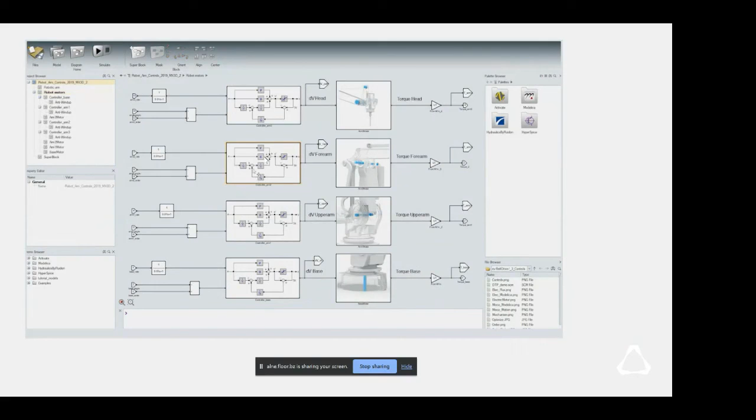So basically what we are doing here is that it's a mechanical system, and by performing this system simulation, we are able to extract all the various loads that come out of the joint locations. And using those loading conditions, we are now going to generate a new concept, a 3D printable concept, and then check for performance for manufacturability. And then validate the performance using the manufacturing simulation. And in this case, it is 3D printing.

So as you see here, this was a collaborative effort. Let me stop that. So this was a very collaborative effort between Altair and MX3D, which is a European company, and they have in fact worked deeply on the WAAM technology, wire arc additive manufacturing technology. And this particular video actually showcases how they were able to not only lightweight the design using digital twin technology, but also use the final design for doing the 3D printing of that part.

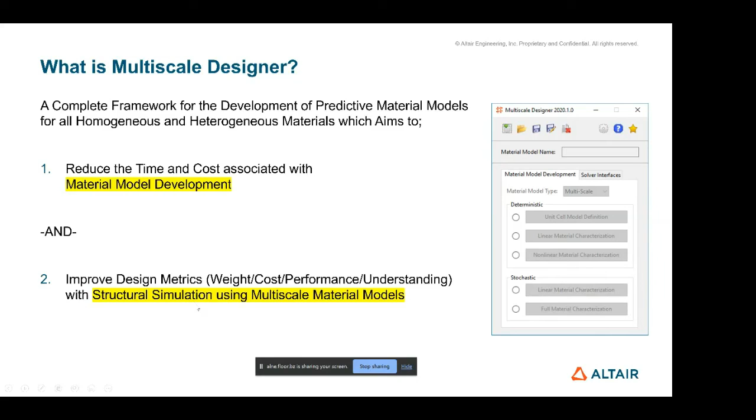The main thing that it provides is it helps us to reduce the time and cost associated with material model development. So if organizations are not able to get the right material properties as far as running these complex physics simulations are concerned, they can use Multiscale Designer to develop the material model and then use it to do all these complex structural simulations to look at the design performance as far as weight, cost, and performance is concerned, right? So the first thing is to develop a material model and then use that material model for all the complex structural simulation.

So apart from, of course, various types of materials, one is these continuous reinforcement materials, which are typically composites, as we call them, unidirectional as well as woven types of composites, to looking at even short fiber reinforced plastics, right? Those types of materials, and even additively manufactured lattice structures. These are very complex structures, right? So to really understand the right material behavior, we need to characterize those materials, and this platform will help us to do that, right? So once you develop that material model here in Multiscale Designer, you can then take that material model for doing all your macro finite element simulations.

Okay. Either you can connect it to our own finite element solvers, structural solvers like OptiStruct or Radioss, or you can connect to third-party finite element codes like Abaqus, LS-DYNA, or ANSYS. So this is a very seamless platform which will connect to multiple codes.

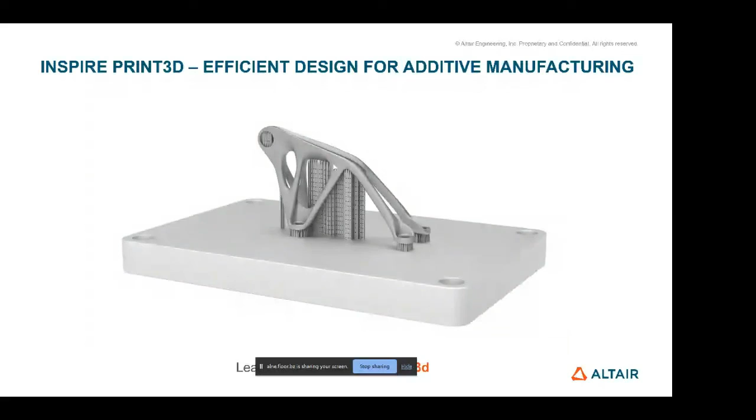So with that, I finally end my presentation. This was a very generic presentation covering this software technology. We call it Inspire Print3D. And it not only helps us to generate efficient, high-performing designs, but it will also help us to check for the feasibility of manufacturing, not only for additive manufacturing, but even other traditional manufacturing processes, whether it is forming, injection molding, and so on. So with that, I end my presentation.

Yeah, thank you so much, Sushil, for sharing your inputs and the insight on how software and simulation can be of immense relevance and importance in 3D printing. That's the reason for this session, which was very broadly extended to ensure that 3D printing and 3D visualization, including software and simulation, is also a part and parcel, because everything goes hand in hand. While we also understand, topology optimization is the key, and also lattice structure with software which can be well formulated with the print that is expected.

And I think there was one question that has also arisen, whether this software can also help DED, which I think with this digital twin technology that you shared, I'm sure it's very impressive. So I think that also takes care of that area that would need to be addressed. Right. The robotic, yeah. So I think interesting. So there was one question that we got.

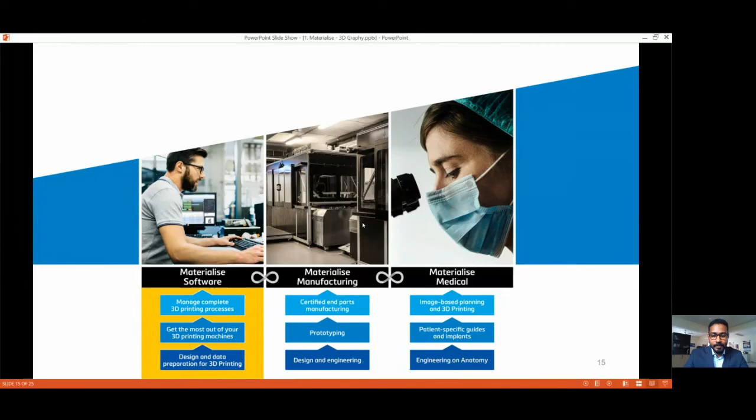If we dive into what Materialise software offers for the additive manufacturing industry, these four verticals actually complete the software suite for professional 3D printing. So if we are looking at creating the best designs for 3D printing, we have Materialise 3-matic.

This is the design optimization software where you want to add lattices, you want to optimize the topology of the part in the STL level, you want to add remeshes to your parts. That is what 3-matic does.

In preparing your files for 3-matic, I did introduce you to Materialise Magics, which is our flagship software for data preparation. There are a bunch of other modules as well, but the interesting one would be Materialise e-Stage, which we'll be speaking about in the forthcoming slides. To get the most of your 3D printing machine, yes, we do offer something called Materialise build processors, which go with the printers that you would probably have as the slicing software that will help communicate the STL from the G-code into the printers.

Materialise Streamics is where you manage your AM production process. For example, where you already have maybe 4 to 10 printers available in your facility, and you want to manage your production, Materialise Streamics is one platform where all your printers can be under one software. You can manage your additive manufacturing production in terms of understanding at what time what part was created, for which customer, which material was used, how much time was spent in the printing of the part. All that database can be managed in Materialise Streamics.

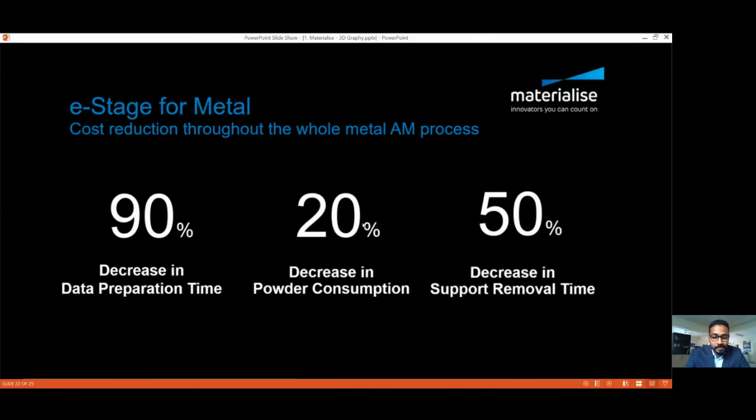And then the powder consumption, which adds to your cost as well, reduces by 20%. And the very painful support removal time reduces by 50%, because with e-Stage you can generate parts which are as thin as your laser spot diameter, which is 100 microns.

The most spoken about software module is also the Materialise simulation module. With the simulation module, to keep it in simple words, you can check if the part is printable or not. If it is not printable, what are the places where the print is failing? Is it the risk of shrink lines? Is it the risk of the recoater coming back and hitting the part because the orientation is wrong?

Or is it the total displacement of the part while printing? Is there a change in the part compensation in itself? Or is there the support structure simulation? Support structures generally, for everyone's benefit, not only help orient the part and hold the part at an angle, but also help in heat dissipation, right?

So these are very basic but very important points which you would need to consider before printing important parts, which would take a long printing time. That's where the Materialise simulation module helps.